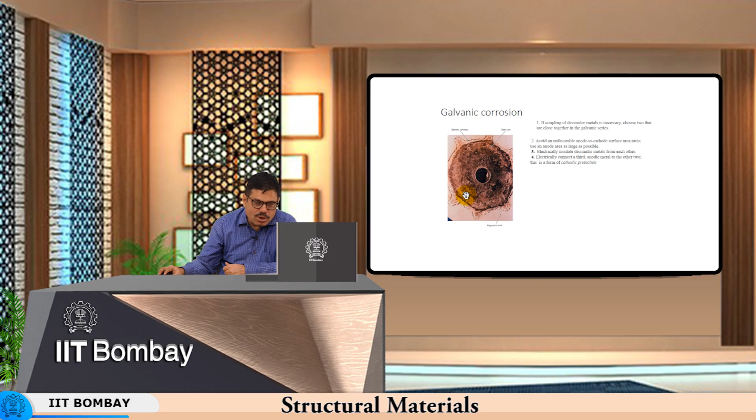So, with respect to the third metal which is more anodic, the metal which you want to protect will act cathodic. Normally it would not have been cathodic. For example, in this case you have this as an anode, but if you were to connect this to another element which is much more anodic, then this will become a cathode, and therefore both these will get protected against any kind of corrosion. So, this is another way of protecting the material from corrosion.

So, the simplest thing is that if you do not want this corrosive reaction to take place, the idea here is not to generate power, but to minimize the corrosion here and corrosion there. So, then what you do is you cut off this electric circuit, and there are various ways in which you can do it.

You need to therefore disrupt the circuit by either putting an insulator there, or by making sure that the anode is connected to a more anodic element, so that the current anode behaves cathodic in nature.

So, for instance, let us say we take a boiler, and you have water being heated in the boiler to high temperature, where the chemical activity of water is going to be very high. A boiler is made out of steel, not stainless steel. You make it out of what is called boiler grade steel, which has got some corrosion resistant elements like close to 9% chromium and so on, but still that is prone to corrosion because of high temperature and high chemical activity of water.

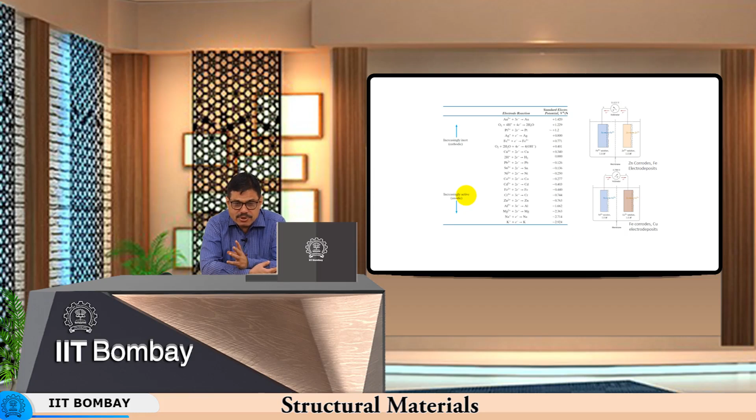In addition to that, very close to the coast you could have sodium chloride in the air, and these chloride ions by virtue of presence of moisture will again attack the metallic materials, particularly the exposed metallic materials, and then react with them. So, the rate of corrosion is much higher in areas which are located close to the seashore as compared to the interior of the country.

So, basically the corrosion depends upon the degree of ionization of the metals. If you prevent ionization, then there is no corrosion. So, the whole idea of disrupting this circuit is that you prevent ionization in the anode especially. When you have one single metal with multiple phases, and each phase is anodic with respect to the other, then you cannot disrupt that circuit because you cannot put any insulator in between. So, naturally it is not possible.

So, let us say tool steels, for example, have a lot of alloy content, and because of this alloy content you have lots of phases in tool steel which might be anodic with respect to the other phases. So, you will have a galvanic cell set up, and a tool left in the air in the presence of humidity will rust quite fast. So, many times tool steels are also seen to corrode quite rapidly.

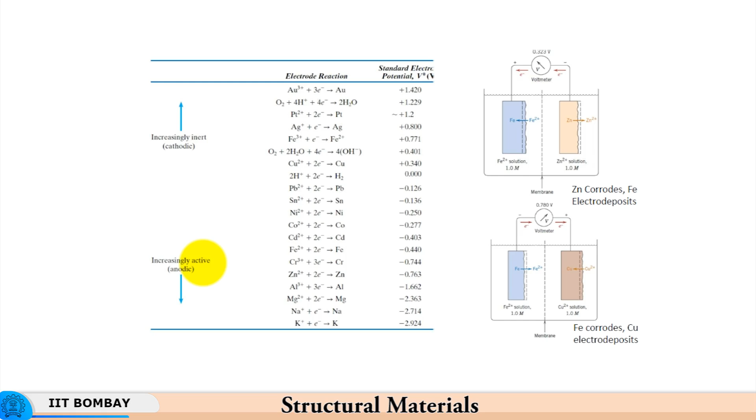So, harder the material, greater the lattice distortion, greater is the state of energy of the crystal lattice, and more severe is the corrosive attack. So, that is what we find in our usual experience.

What is oxidation? You have oxide formation, where again the metal gives out electrons, metallic ions are generated, and these metal ions are in the presence of oxygen and some moisture, because then the transport of ions becomes easier through the moisture. So, ½ O2 + 2e⁻ gives oxygen ions. Then M²⁺ and O²⁻ combine to make an oxide layer.

Now, if this oxide layer is tenacious, so it does not allow any ions to pass through, as in the case of aluminum oxide, then once an oxide layer is formed, there is no further oxidation. Similarly, chromium oxide. Stainless steels remain stainless only because once a chromium oxide layer is formed, there is no further oxidation. Otherwise, the material will continuously get oxidized, particularly if the oxide is porous.

For instance, iron oxide is very porous, due to which oxidation never stops. The first layer of oxide that is formed has M²⁺ and O²⁻ coming together, making an oxide of the metal, but being porous, the air continues to have access to the interface, and with further exposure, the interior layers also get oxidized because of the availability of oxygen, moisture and the conductive environment. The oxygen continues to move inwards through the porous medium, and the metal ions are always available to react with it.

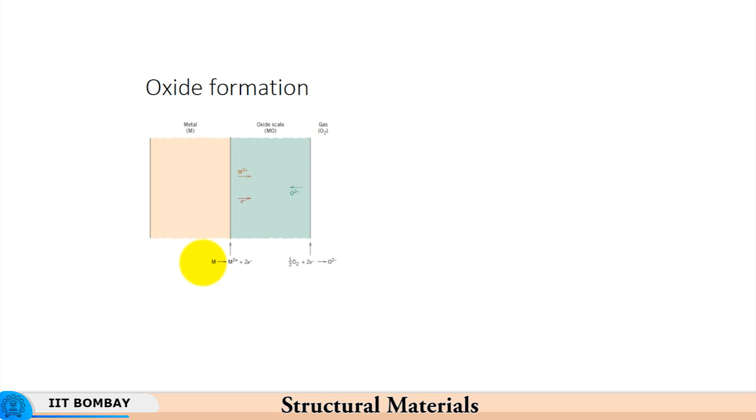Well, I was telling you that we use products for many years, and then over a period of time we find that they have got rusted at various locations. Now, crevices are among the major or the preferred locations where corrosion starts, especially if the environment is seawater. Now, seawater contains at least sodium chloride, if not more, because seawater is extremely polluted in nature.

You know that all rivers end up into the seawater, and so the pH of the seawater is anything but 7. So, it is more acidic in nature because of presence of sodium chloride. So, as you see here, the corrosion starts in crevices, meaning where the exposure to air is practically nil. So, in a crevice the availability of oxygen is extremely small.

So, what happens is that in the crevices the anodic metal will give out electrons, and these travel through the metal, come to the surface over here in the presence of oxygen. So, wherever there is large amount of oxygen, they generate OH ions, so hydroxyl ions, and then you have these Cl minus ions going in over here, reacting with the metal. The metal gives up electrons.

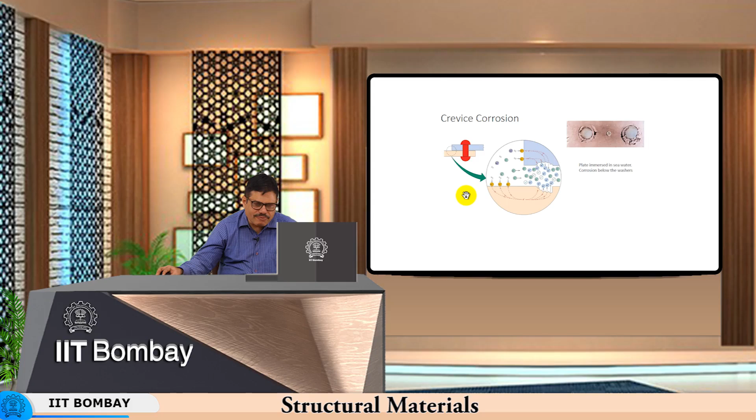So, that is what we were seeing over here. So, when electrons come here, the surface effectively gets reduced, and therefore, there is no loss of material from here. So, this surface behaves like a cathode. So, wherever a lot of oxygen is available, it becomes a cathode. Wherever oxygen is depleted, where oxygen is much less, you will find that there it is an anode.

So, if you take a threaded connection, where will the corrosion take place? Obviously in the threads, because the threads are the ones where you have the least amount of oxygen getting access to it. So, when two metals are in contact, the corrosive medium that gets in between the two threads would result in a similar situation, with the exposed part of the threaded connection behaving like a cathode and the threaded portion behaving like an anode.

So, the result is that we always find that the threads are getting jammed. So, if you have not dismantled something, or done and undone a threaded connection from time to time, you will find that the threaded connection gets jammed over a period of time. It gets jammed because of oxide getting generated at the interface. This oxide or these corrosion products may not necessarily be oxide, depending on the environment.

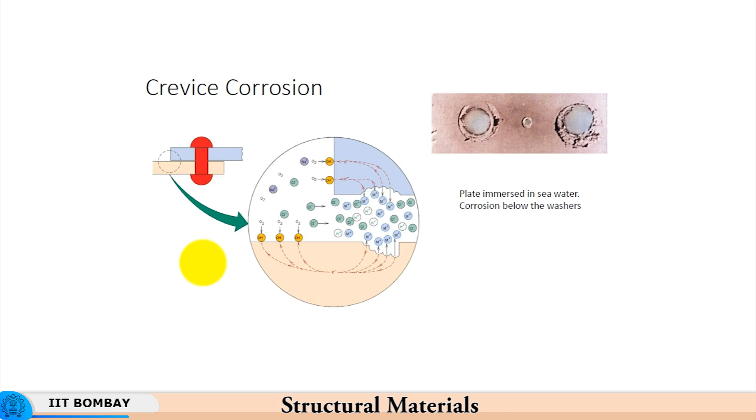So, the result is that the film of the reaction products, or the film of oxide, will be porous in nature, and that is the reason why the oxidation or corrosion can take place unabated. So, we have seen that oxidation occurs in the pit itself with complementary reduction at the surface. It is supposed that gravity causes the pits to grow downwards, the solution at the pit tip becoming more concentrated and dense as the pit growth progresses.

Actually, by gravity the corrosive liquid might continue entering the pit, and then because of the pressure, the height of the liquid column is increasing. So, the surface which is to be eaten away will have a big liquid column on top of it. So, some effect of increasing pressure on the fresh surface being corroded will also play a role, and as the solution becomes more concentrated and the pit growth progresses, the rate of corrosion will also be that much higher, because the current density is going to be much higher as the pit gets deeper and deeper.

So, the cause could just be a surface flaw, a machining mark, a defect such as a scratch, or a slight variation in chemical composition. As I said, if you have two different phases present, one is more anodic with respect to the other, then that phase will get eaten away first. Now, if the phase gets completely removed, the corrosion will automatically stop, but if it has its presence throughout the thickness, naturally you will find the corrosion progressing right through the thickness.

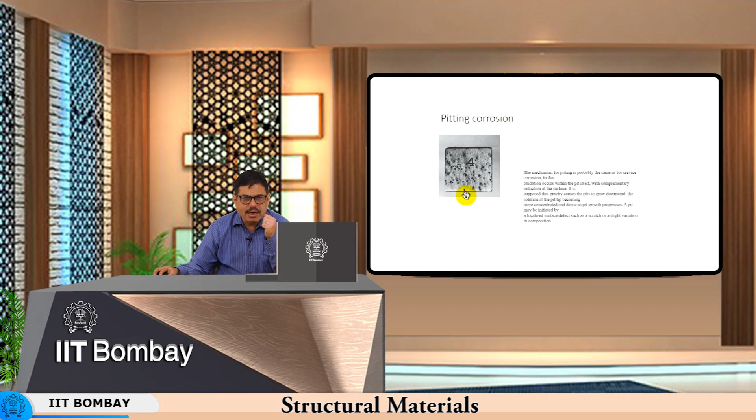So, that is why it is important that the metallurgy of the workpiece is chosen or tailored so that there is no susceptibility to corrosion, be it pitting corrosion, crevice corrosion, or any other form of corrosion. So, one thing is to have good surface finish in order to minimize corrosion, but if you have different phases on the exposed surface, then they are again going to promote corrosion.

So, what I was just talking about happens in the form of selective leaching at times, because between two phases, one is extremely anodic, and when you dip it into some sort of electrolyte, let us say a liquid medium for instance, then one constituent gets preferentially removed, meaning it gets dissolved in the liquid medium, and so that is called leaching.

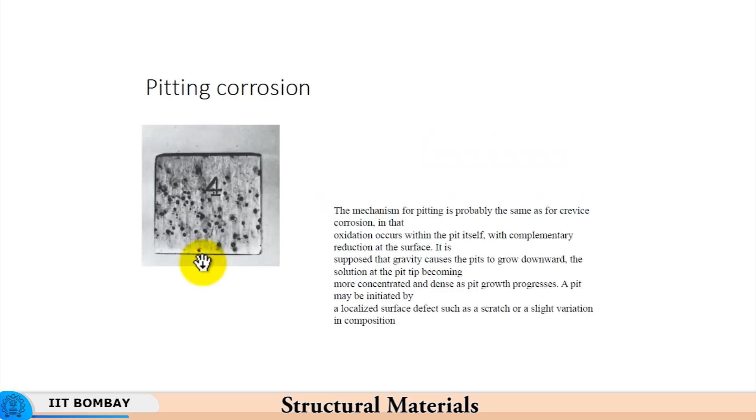So, this is typical in case of brass type of alloys, where you have what is called de-zincification of brass. Essentially, 70-30 brass for example is 70% copper and 30% zinc, but this zinc can get selectively leached out from copper. Now, if you look at the galvanic series which we saw earlier, you have copper over here and zinc over there, so they are far away from each other.

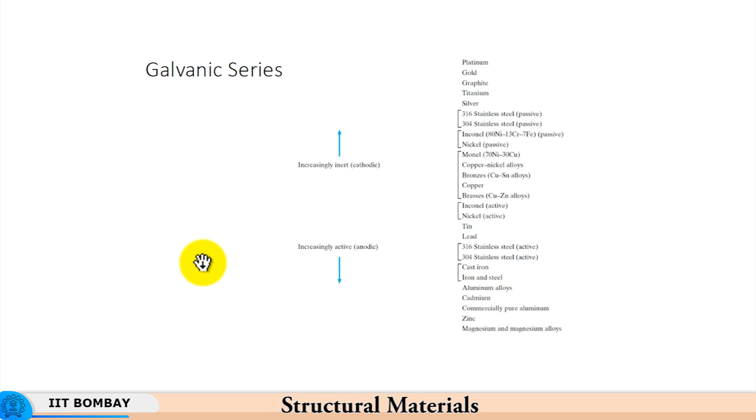Zinc is much more anodic as compared to copper, and therefore some zinc is dissolved in copper, the rest of it remains, and you have a loss of zinc to leaching. So, zinc is much more chemically active, it is more anodic, so it can selectively get dissolved. Aluminum, iron, cobalt, chromium and other elements which are vulnerable to preferential removal will cause selective leaching in those alloys. So, it all depends on what the other alloying elements are.

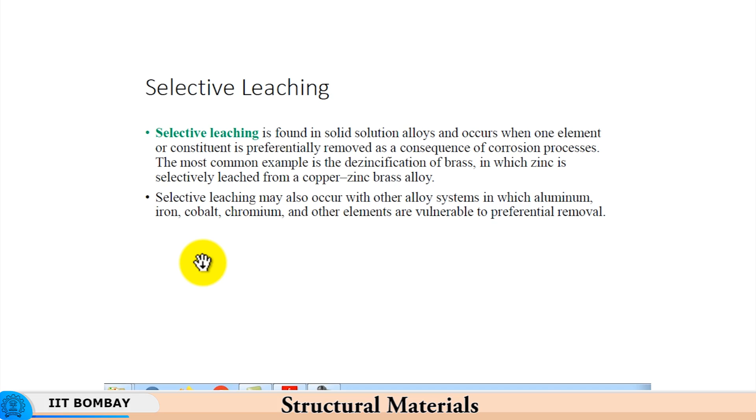So, the point here is that selective leaching can take place depending upon the overall chemical composition and the relative electronegativities, the relative behavior among phases, one phase behaving as anode, the other one behaving as a cathode. So, supposing something is highly reactive and it becomes anodic, then it can get easily leached away, meaning it can get dissolved in the solution, meaning in the corrosive liquid that is present there. So, then you will be left with pits from which zinc has been eaten away.

Now, in the presence of a stress, the corrosive attack is even more severe. We have talked about temperature and humidity as something that aggravates corrosion. Now, another element that aggravates corrosion is stress.

I have discussed earlier that when a stress is applied, the stress fields of dislocations interact, the stored energy of cold work increases, especially where the deformation is very high, dislocation density is very high, or residual stresses are very high. There the stored energy in the material is very high, and in the process of reducing that stored energy, the corrosive attack gets promoted or becomes easier.

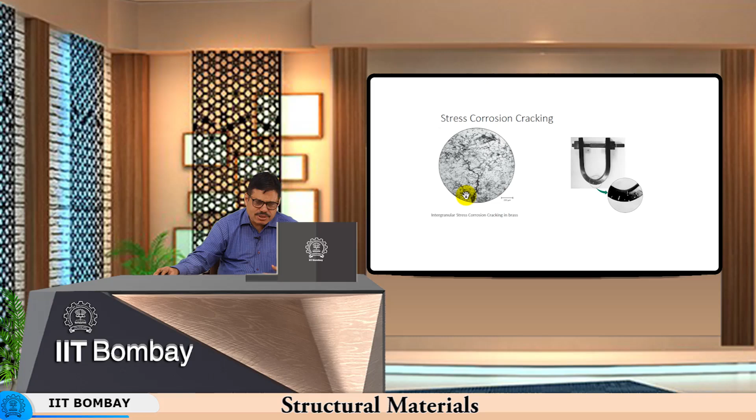Now, we must understand that the tensile stresses tend to open up cracks, the tensile stresses tend to open up defects. So, the attack will be preferentially in areas where the tensile stresses are relatively high, and so that is where corrosive attack will be much more severe, and it will result in the relief of these tensile stresses. So, as the corrosive attack takes place, new surfaces are generated, and these new surfaces result in the relief of the stress. So, if there is residual stress, it will get relieved by virtue of generation of new surfaces due to corrosion.

So, in brass for example, you have stress corrosion cracking taking place because this region was under high stress, and the corrosive element, let us say the corrosive electrolyte, found these highly stressed regions, high energy regions, much more amenable for a corrosive attack.

Now, all corrosive attack therefore happens at the grain boundaries. So, the grain boundaries are the ones which are attacked by corrosion. That is because grain boundaries are already regions of high disorder, they are regions of high energy, they already have a large amount of dislocation density, and added to that you have a much greater energy of cold work that has been stored over here, meaning large plastic strain, the tensile stress that is present here is much more, and so the grain boundaries become much more susceptible to attack.

Now, the difference between etching and corrosion is that when we want to reveal grain boundaries, we etch with a small, say 0.5% nital or something like that, nitric acid in alcohol. So, we add a very small quantity of nitric acid to alcohol. So, the idea here is not to corrode the material, the idea is to selectively etch the grain boundaries, meaning it is a selective corrosive attack which is intentional.

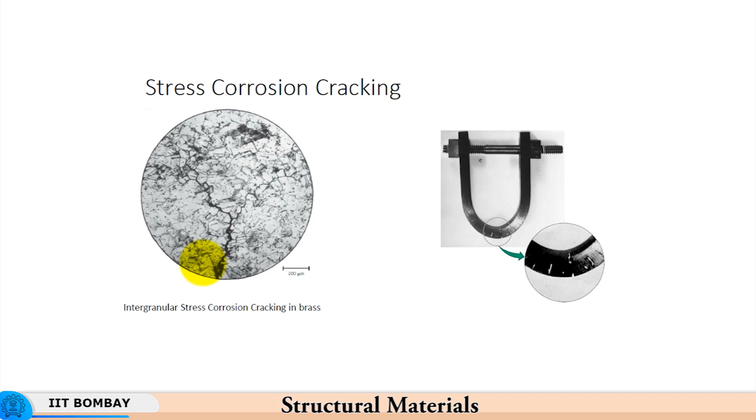Now, while preparing a sample for metallography, supposing you have not polished it properly or maybe polished it with a very high pressure, it will have what is called a disturbed material on the surface. So, disturbed material means there is a lot of sheared material on the surface, due to which when you etch the polished surface, you will find that grain boundaries are not getting selectively revealed. What happens is the entire surface tends to get corroded, the entire surface tends to get etched.

That is because of shearing, because of a very large amount of force you might have applied, or because of very large local surface deformation that has taken place. There is a lot of stored energy of cold work. So, the difference in the stored energy at the grain boundary versus the grain interior is not much, and therefore, you cannot distinguish the grain boundaries properly from the interior of the grain. So, that is another outcome of the so-called disturbed material which gets etched unintentionally. So, basically what I am trying to say is that because of the stored energy of cold work, because of presence of stress, the corrosion takes place and cracking takes place.

Another means of enhancing the corrosion is erosion corrosion, where you have corrosion taking place and the corrosion products are eaten away, they are removed by erosive material, abrasive material. So, for instance, you have sand, or in air you have dust particles. So, all these tend to erode the metallic structure. The corrosion takes place, the abrasive particles erode the corrosion products, the corrosion products get removed, and then you have fresh metallic surface getting exposed to the corrosive environment. So, this is called erosion corrosion.